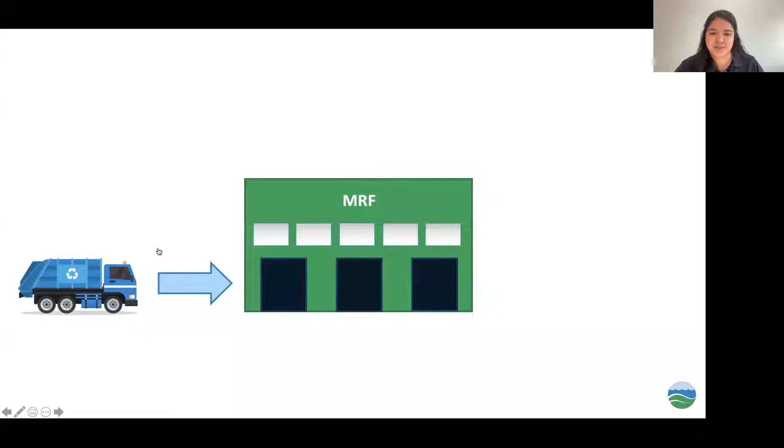So let's just pretend we're the garbage truck and we're making our way to the materials recovery facility. First, when we get there, we get to the little scale house. This is where all trucks are weighed once they go in, because we charge by the tonnage and the type of waste that you bring inside.

So in this case, Basil's driving, he's the chauffeur. So we're here driving in.

This is the first view that you get of the MRF when you drive in. There's a lot going on. And here to your left, you have these beautiful bales ready to be sold.

If we were here in person, we would be walking up in the mezzanine and we'd be able to see everything from up there. But it's pretty cool because now that we're virtual, we're going to be able to see a lot more and go into a lot more detail. Hopefully it'll be a better experience.

I think it will. So this is our Disneyland. This is trash Disneyland. Everywhere you look, there's different kinds of trash. There are different numbers to sort, to distinguish the different types of stations that there are. So we're going to try to go over the main ones.

I know a lot of people are obsessed with garbage trucks, so I had to put this garbage truck video. Sometimes there are kids watching, so this is the garbage truck. Here it is. Remember, this is your blue bin material, because this is the recyclable section.

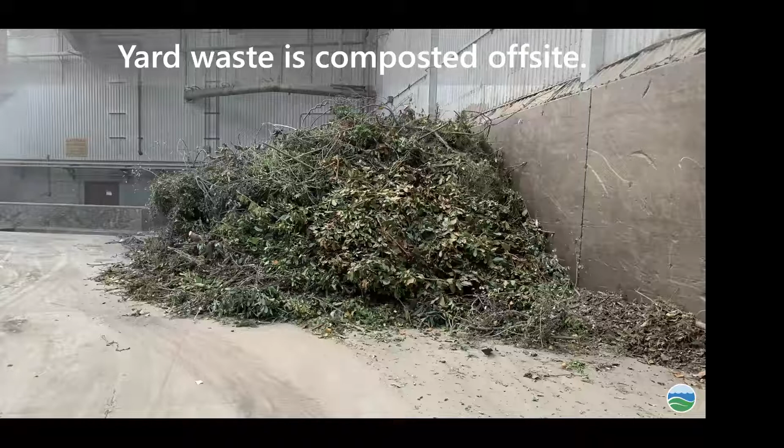Most of the recyclables, everything that you put in the blue bin, are shipped overseas. We have recycle markets, China being the main one, and a lot of the neighboring countries. A coworker described it as the perfect marriage, because a lot of countries around the world receive a lot of goods from China. So you have all these shipping containers coming in, and instead of having about 40 to 60% of them go back empty, it made a lot of sense to fill those containers with recyclables to send back over there. So there were no wasted trips.

However, China began to toughen their standards because there were a lot of impurities in the recyclable bales that they were receiving that had a lot of environmental impacts. So they started to toughen their standards, and soon they had the China ban, which was a series of regulations that placed stricter limits on the types of recyclables they were receiving. This had a huge impact, not only in the US, but countries around the world.

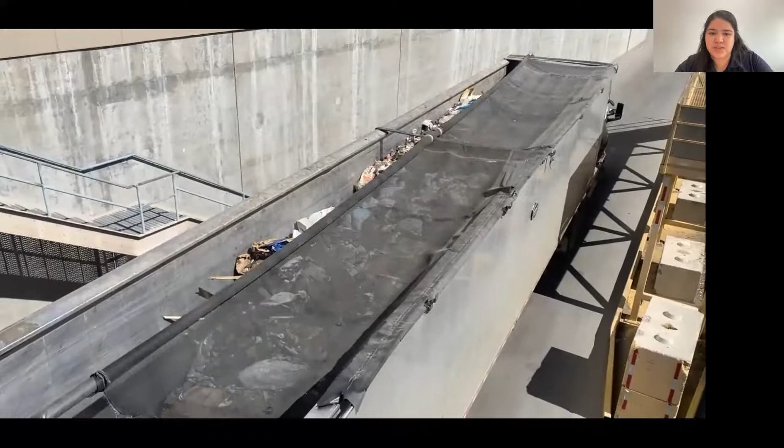So here we have a truck, one of our trucks that's leaving our MRF, and you can see it's carrying all the trash that didn't make the cut. And of course, we will cover the top of the truck so that none of the debris falls while it's being transported.

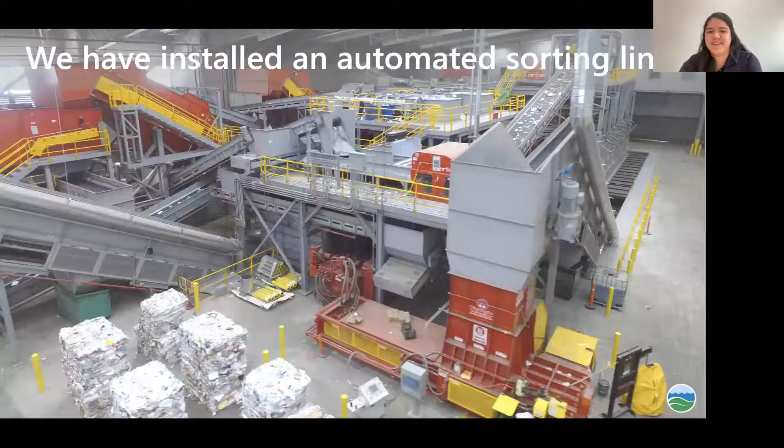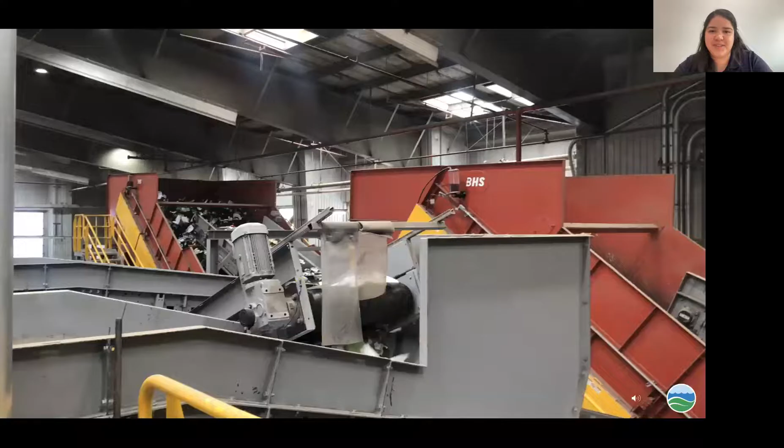All right, now going back to the automated sorting line at the materials recovery facility. We had planned this for a while, but the China ban definitely sped things up. Let me give you my little Willy Wonka type tour or overview of this materials recovery facility.

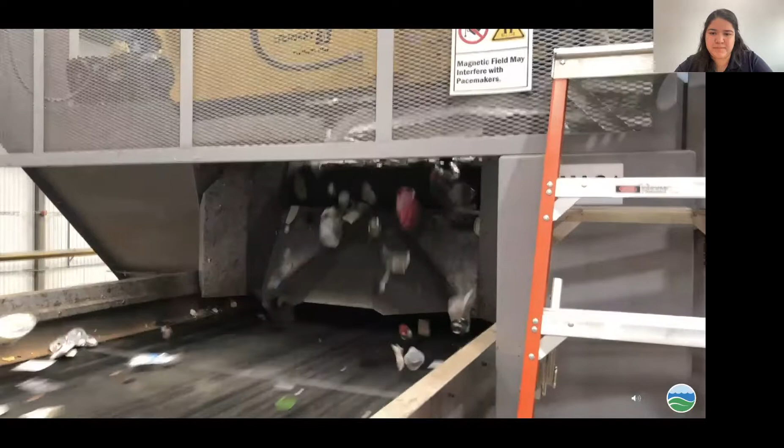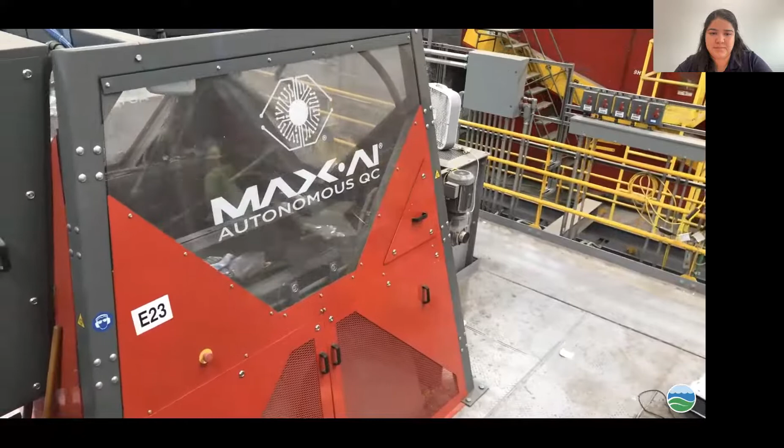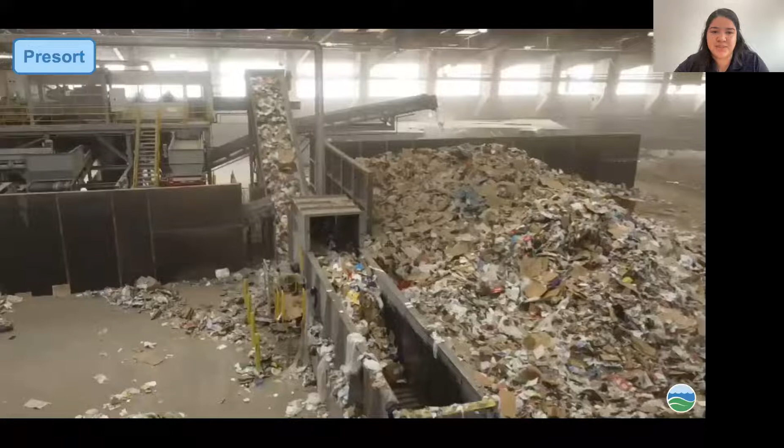Okay, so that's a short little overview. As you can see, there are a lot of moving parts that make up our automated sorting line. So we're going to go through the steps.

First we have the pre-sort, the pre-sorting machine. Habib, do you know what it's called? This just slipped my mind. Is it a crane or? So we have this machine with the crane tool, it's called a materials handler. Okay, materials handler, I was not thinking of that one at all.

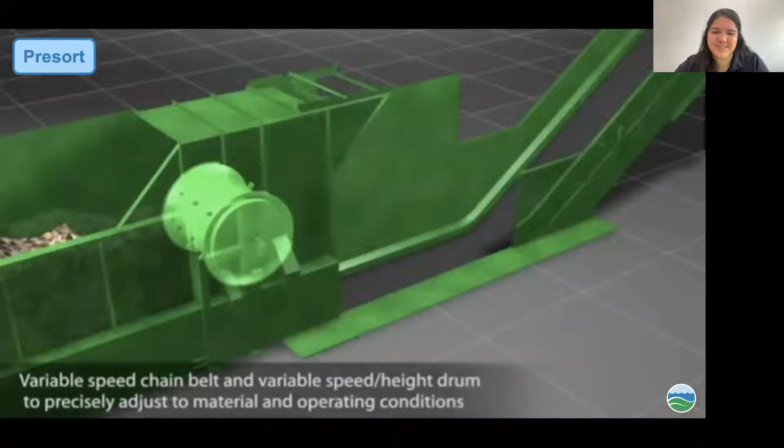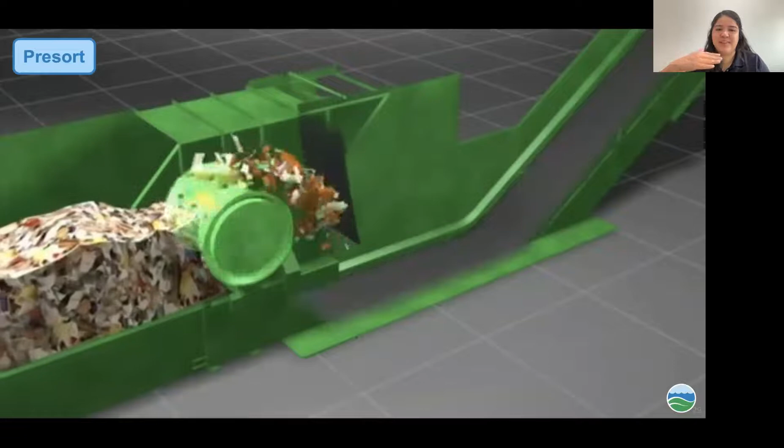The materials handler puts all this waste, the recycled goods, into this pre-sorting machine. What this pre-sorting machine does is it has a drum that helps flatten the waste out so it's easier to sort through. Some goes over, some goes under, making it easier to go through. You see staff right here doing a pre-sort check, removing any large items that don't belong there, or items that could harm our machinery, such as cables that could get stuck. So that's the pre-sort process.

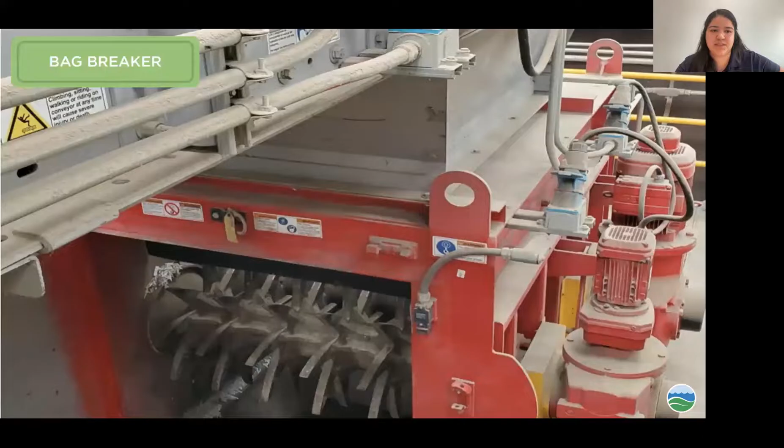Now we're going to start our official step-by-step of what this automated sorting line does. So, bag breaker does exactly what the name says. When the trash goes in, it goes through a conveyor belt and breaks any bags.

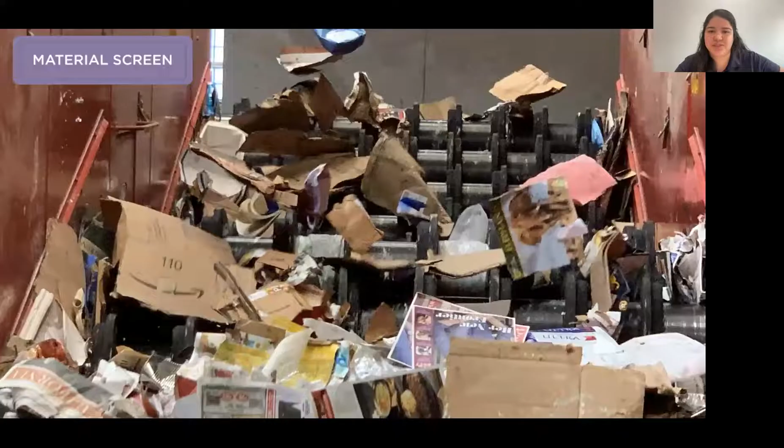From there, we have the material screen. The material screen is pretty neat because you have these rotating heads right here. What happens a lot through this automated sorting line is lighter material is separated from heavier material. So in this case, all of the lighter material like cardboard, empty water bottles, detergent jugs, is very light and it just kind of surfs through the top, while heavier particles such as glass go down, fall through, get crushed, and then are sorted separately and recycled.

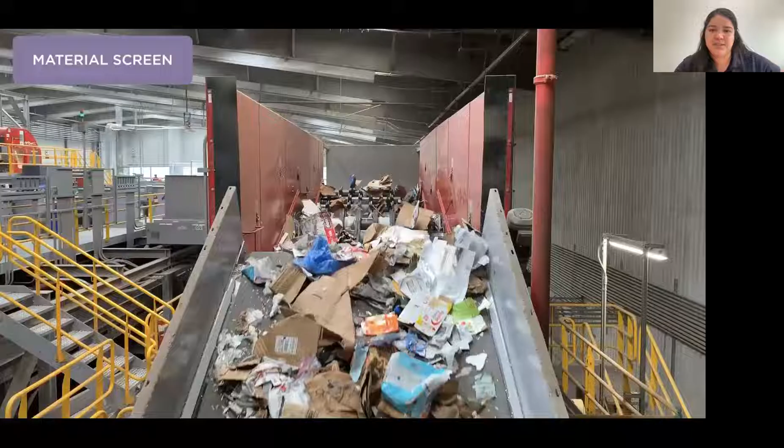So here you have a quick little video of how the material screen works. Let me just play that again. If you notice, you can kind of see all those light items just surfing their way through the top. You even have this little detergent jug flying over there.

So then after the material screen, you have the air separator that pretty much does the same thing again, separating some of the heavier materials, like containers with liquids in them or shoes, from everything else. Then we move on to the polishing screens, which separate from here.

We get two separate categories: 2D items and 3D items. For 2D items, you consider cardboard and paper, whereas 3D items are your aluminum cans, water bottles, detergent jugs, milk jugs, and all those other 3D containers you can think of.

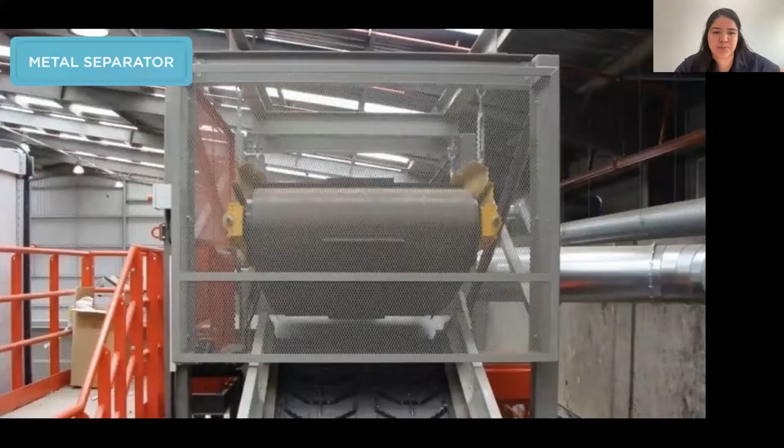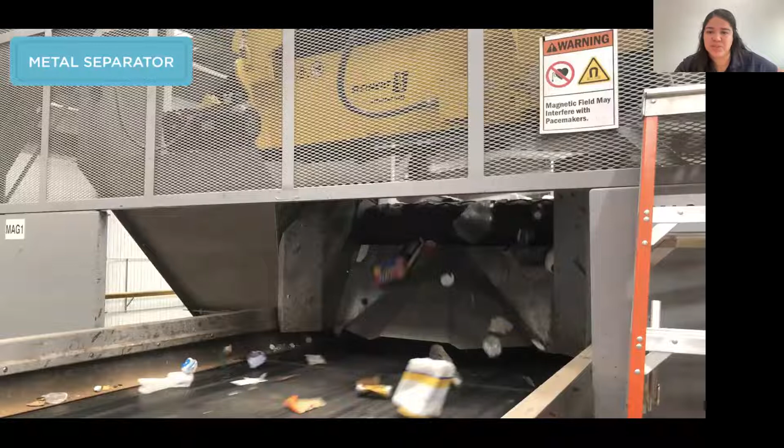So we're going to talk about the metal separator, which has two different parts. Here we have the one with the big magnet that is able to separate the ferrous metals. From there, it goes to another machine called the eddy current separator. What the eddy current separator does is it has electromagnetic rays that help sort out the aluminum within that way. So all the aluminum cans get separated out there.

So now that we have the metal separated from the 3D materials, this leaves us with all the plastics—the water bottles, the jugs, mainly water bottles and jugs.

So from there, we have optical sorters for each process. In the paper process, we have an optical sorter to sort out the cardboard and the paper. Then on the 3D side, we have an optical plastic sorter that helps differentiate between the different types of plastic because they go into different containers, different bales. So the water bottles will be separate from the plastic juice bottles or detergent jugs.

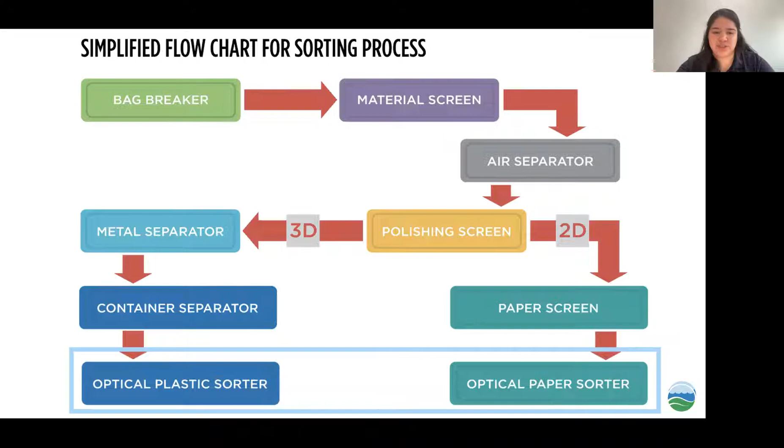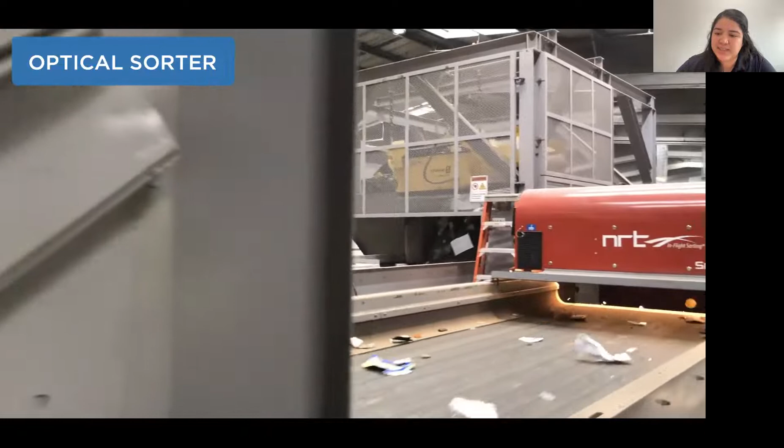So this is a picture of our optical sorter, and this is how it works. It uses infrared light to detect the type of waste it is, and it has little air jets at the bottom of the optical sorter that pump it up and help separate the waste like that.

So let me play this video again. If you notice here, I tried putting it in slow motion. The cardboard, it's like, bam, you see that? It just shoots up. It's really, really cool. So plastics have different kinds of thickness to them, and that's how the infrared light is able to detect which one should be sorted where.

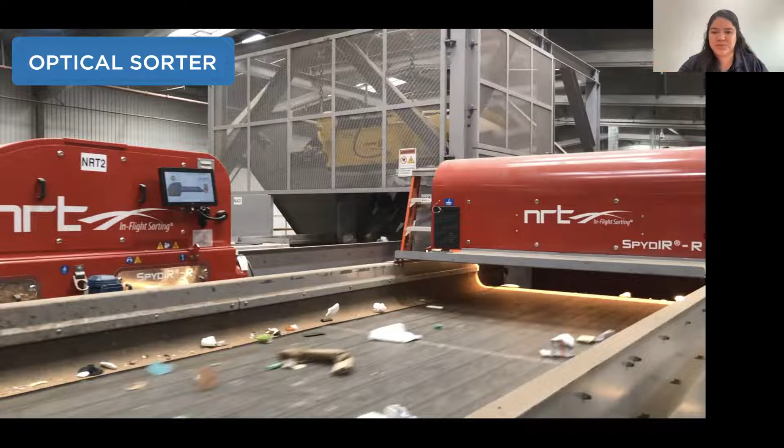Moving on, this is, I think, the more popular part of the entire automated sorting line. It's this robotic sorter, which is really cool. It does a post check of all the work that the other parts of the sorting line did.

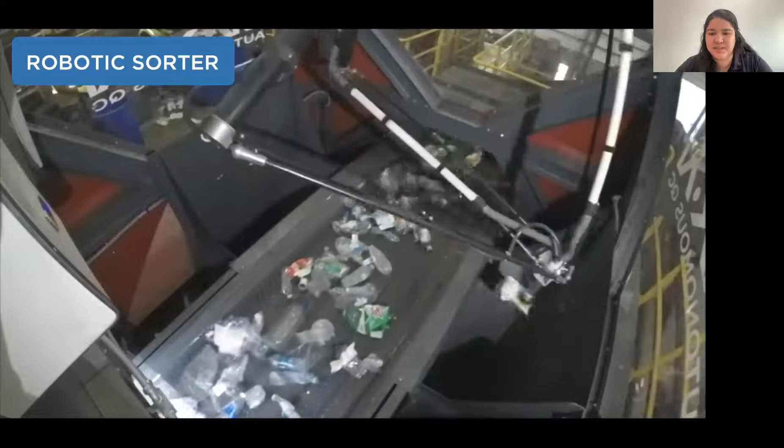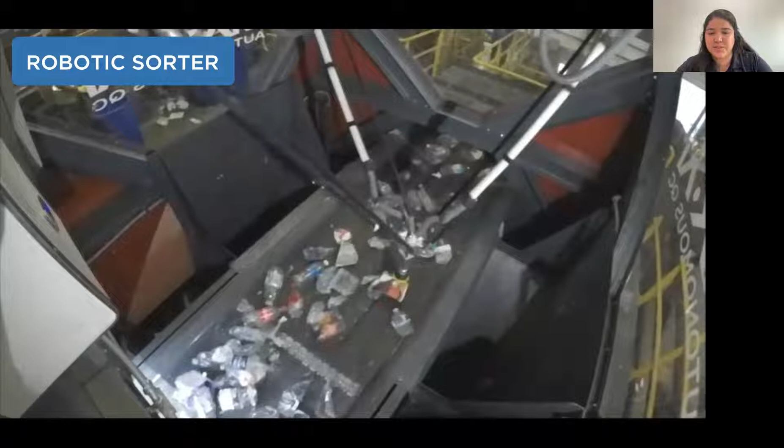If you see, it's removing any item that's not a plastic water bottle. What's really cool about this is it's not only 4 times faster than a human being that doesn't stop, it's nonstop, but it also gets even better with time because it learns from its own experience. So it gets even better.

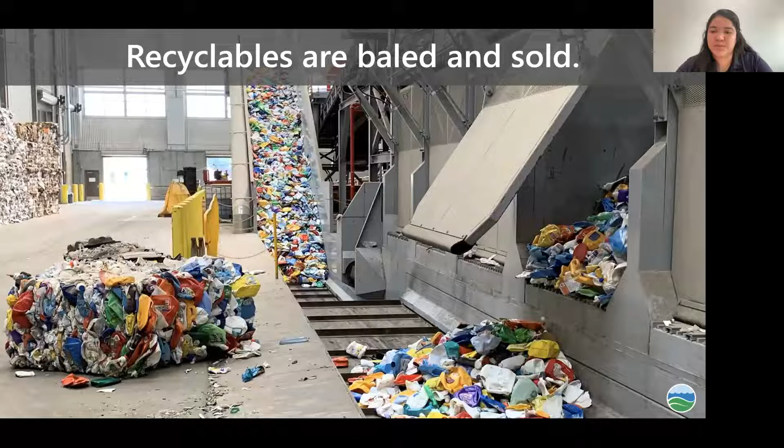So then after that, we also have people that do a post sort. And then after that, we have the recyclables. Now that they're in their different categories or different containers, they're able to go up this conveyor belt and then be baled according with the rest of their group.

Now, moving on to another portion, another service that we provide at the Puente Hills Materials Recovery Facility is food waste. But before we get into food waste, just a little bit of backstory.

LA County generates 21 million tons of waste per year. And of that 21 million tons, about 9 million tons is buried in landfills. Of that 9 million tons that's buried in landfills, a third of that landfilled waste is organic material — yard waste and food waste. So food waste that's disposed of in landfills can release methane to the environment if that landfill is not properly managed.

So the state of California recently passed a few laws to require cities to create programs to divert this organic material from landfills, to help residents and businesses divert this waste. The goal was to have a 50% reduction in landfilled organic waste by the year 2020, and then a 75% reduction in landfilled organic waste by 2025.

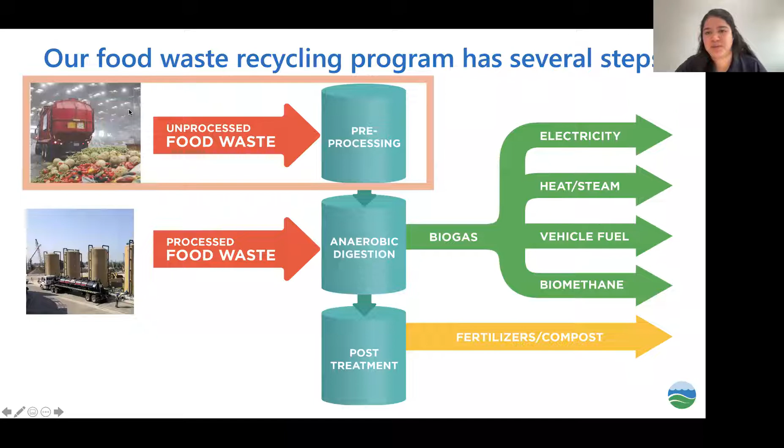Let's first start with the unprocessed food waste. I mentioned the garbage truck in the beginning that we came in — some of them drop off recyclables, some drop off yard waste, others drop off food waste. So here is an example, a beautiful example of source separated food waste that we collect.

Acceptable source separated food waste will have no more than about 10% impurities within that load. If you notice here, it's really all food waste, with the exception of these little small cardboard pieces, but the majority, definitely more than 90%, is food waste. So this would be an example of an acceptable load.

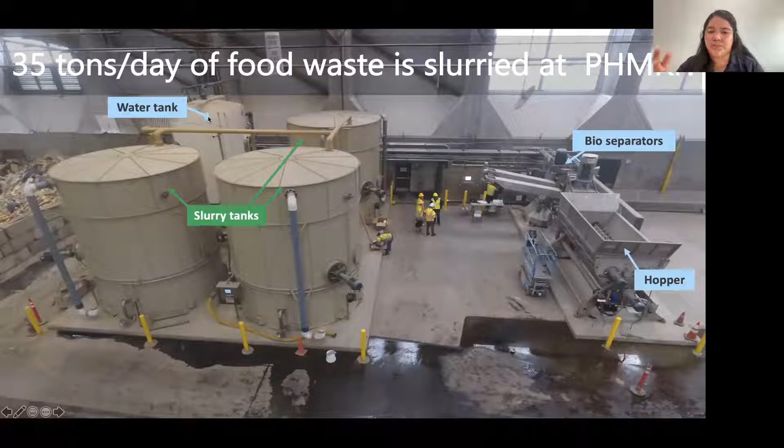This food waste is then processed at our materials recovery facility. We process 35 tons of food waste a day. This is our DOTA system that is able to convert this food waste into slurry. We have the hopper here that has a bag breaker and pushes that food waste to the bio separators that grind up the food waste and turn it into a slurry. Then here we have our slurry tanks that store that slurry, and our water tanks in case we need to dilute the slurry a bit.

So let's watch a video of our first load.

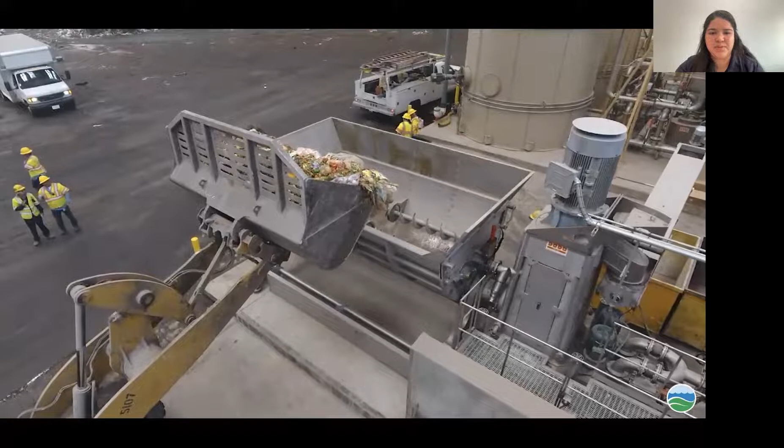The first load that happened a few years ago — was it 2016, Habib? Or no, it was later than that, right? Like 2019?

Yeah, about 2019. So this was the first load. We had already been accepting food waste before 2019, but in 2019 we had this whole DOTA system put in place.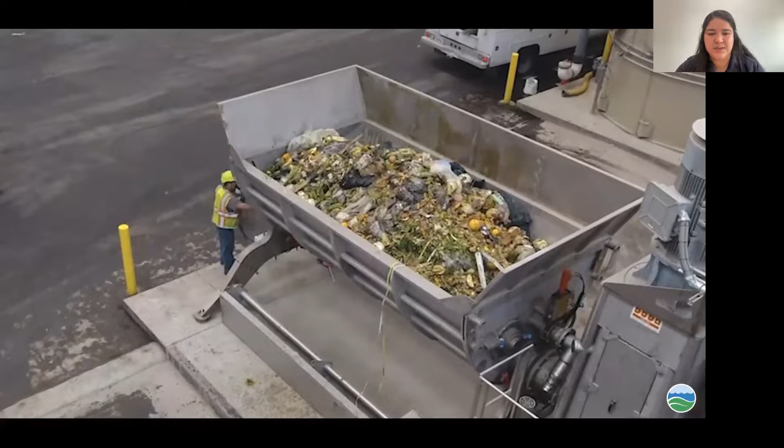If you notice here, food waste is being dumped in, and then the hopper turns on. You see it churning, breaking the bags, and then it's sent to these bioseparators here to the right. A good analogy is comparing it to a garlic presser, which you're going to see in a bit.

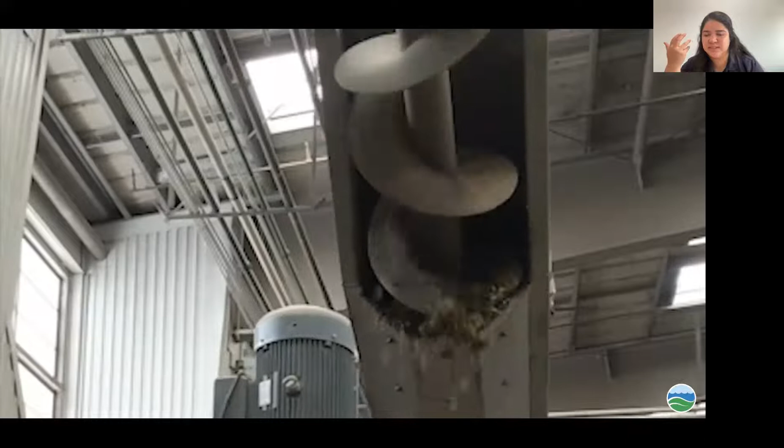So when it goes through these bioseparators, it presses the food waste from the inorganic materials. If you're thinking about a garlic presser, it's like the skin of the garlic, right? So any inorganic material is sorted out in the machine, and then it presses it.

So it goes through it twice. On this one, it has even finer holes. The food waste that you get out of that is now separated from the inorganic material that's left out. And then it goes through a secondary process, and you'll notice here the food waste is a lot finer.

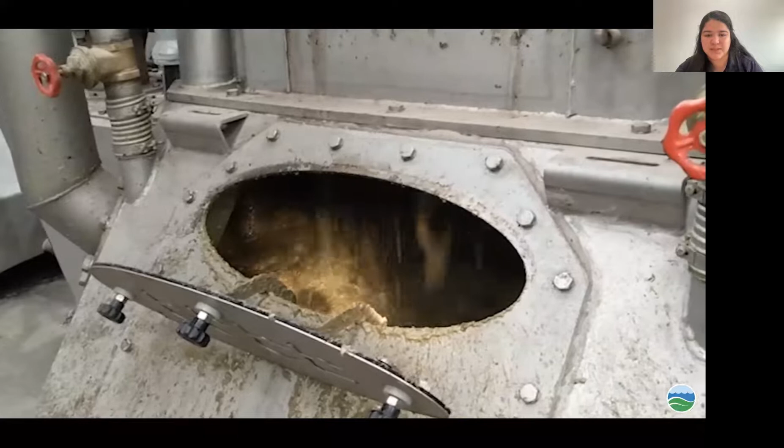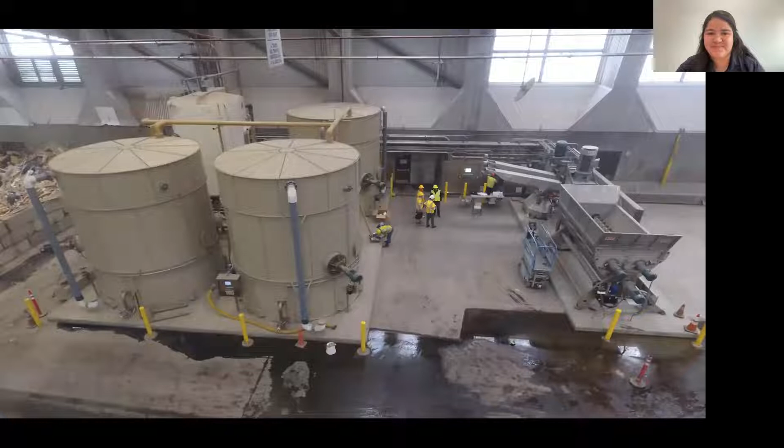From here, it's turned into this slurry that looks like a Coca-Cola Slurpee, but not as good — though Coca-Cola Slurpee was the first thing I thought of. So now that we have the slurry, we put it in the slurry tanks.

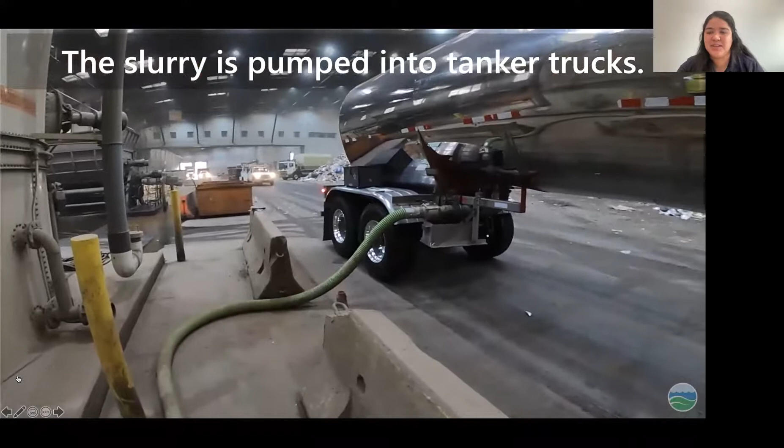The slurry is then pumped into these tanker trucks, as you see here, which is kind of cool because when I saw these tanker trucks out in the street, I always thought it was just gasoline being transported. But in this case, it could also be food waste slurry.

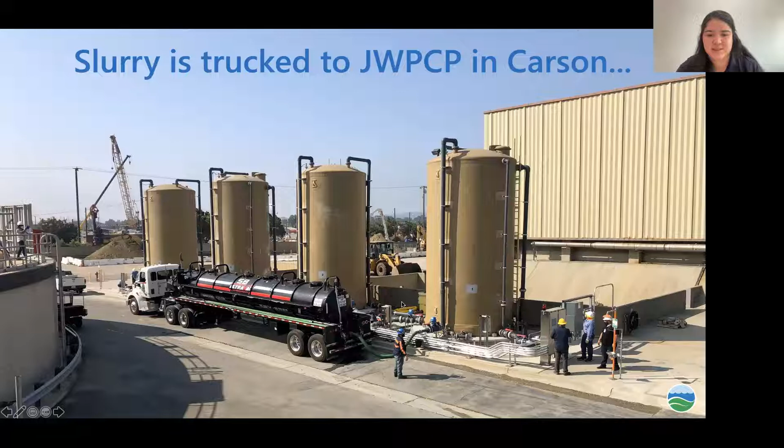This food waste slurry is then transported to the Joint Water Pollution Control Plant in Carson. Here we have our slurry tanks for receiving at the Joint Water Pollution Control Plant. This is where we go to the next step of this food waste recycling process.

What we do with the processed food waste is we put it in these anaerobic digesters along with the solids that we have recovered from the wastewater treatment process. So all the solids left over from the wastewater treatment process are put into these anaerobic digesters.

With this food waste now, it's heated up to about 96 degrees. It's kept there for about 15 to 16 days. We have these microorganisms that feed on these solids and organic material, and from there, we get biogas.

From there, it goes to our energy facility at the joint plant, so we produce energy from this biogas. We produce 20 megawatts of energy, which is enough to power 20,000 homes.

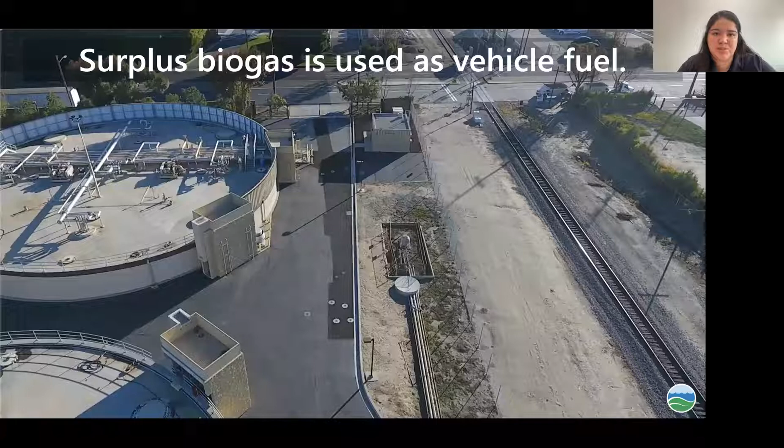Now that we have surplus biogas — and let me mention too, with just a little bit of food waste that we add, we were able to double the amount of methane we produce in these digesters — with our food waste program, we'll have surplus biogas. So we created a pipeline to take it from these digesters down the street.

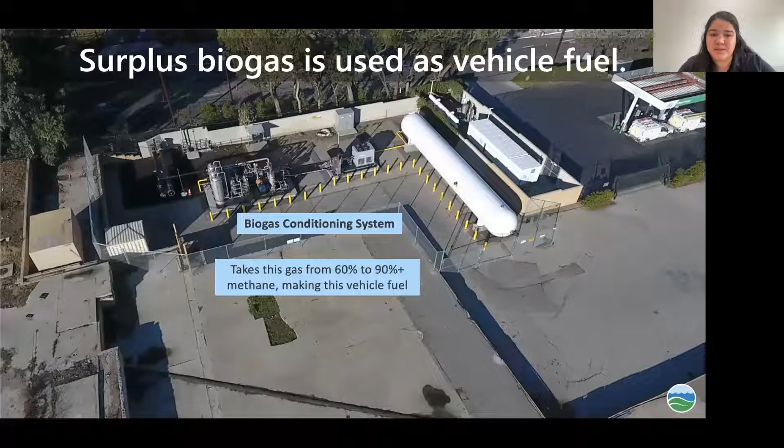You see here, the middle one is where the pipeline goes. We make a right over here, and we see our biogas conditioning system. This biogas conditioning system takes this biogas from 60% to more than 90% methane, which is able to turn this into vehicle fuel. This is a picture of our biogas conditioning system.

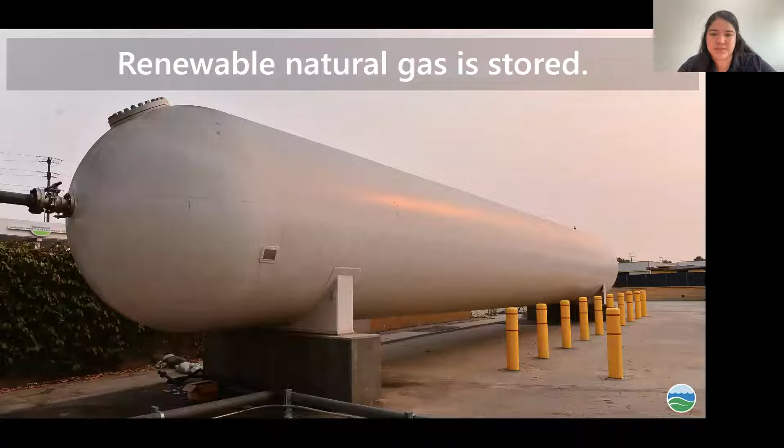Right next to it, we have the natural gas storage tanks, and right next to that, we have our fueling station. This is pretty cool to me because one minute we were just talking about food waste, and now we're talking about how this food waste literally gets turned into vehicle fuel.

So these cars that run on natural gas, it's running on our food waste. It's pretty awesome, I can't get over it.

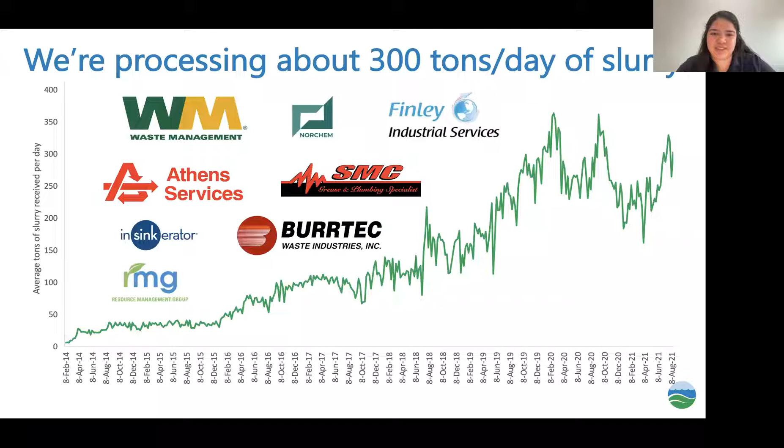We're processing about 300 tons a day of slurry. These are our beloved customers that bring their processed food waste to us. So of the 300 tons, that's equivalent to about 2,000 gallons of gasoline per day.

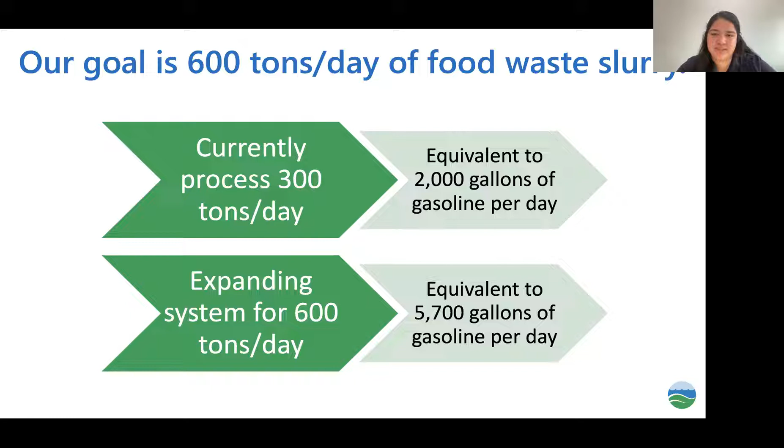We're currently expanding our system because we expect to be receiving even more food waste with new California state mandates. We're expanding our system to be able to receive about 600 tons per day, which will be the equivalent of 5,700 gallons of gasoline per day. So if you have a regular car, we'll be able to fill it up about 570 times.

So we went over how we generate electricity from it. We can charge cars. We have a car charging station at the Joint Water Pollution Control Plant, and this one is at our main headquarters in Whittier. We have the vehicle fueling stations, and in the future we can also inject it into the natural gas pipelines.

This concludes our story on how special the Puente Hills Materials Recovery Facility is. It helps us be one of the biggest producers of green energy. We generate about 28 megawatts a year, and we only use about 23 megawatts for some of our facilities. So when you add that with the 20 megawatts we're producing from wastewater management, and 30 megawatts from refuse to energy, any surplus energy goes back to the grid.

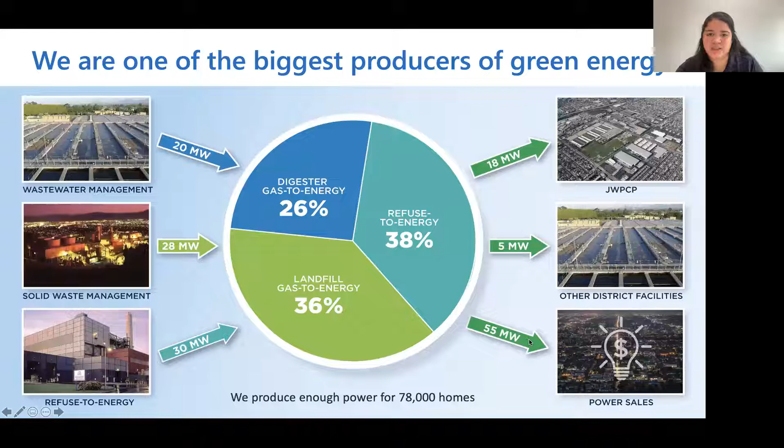With that, that concludes today's tour. I hope you enjoyed the virtual tour, but being in person is also really cool and has its own benefits as well, so we look forward to welcoming you into our facility soon.

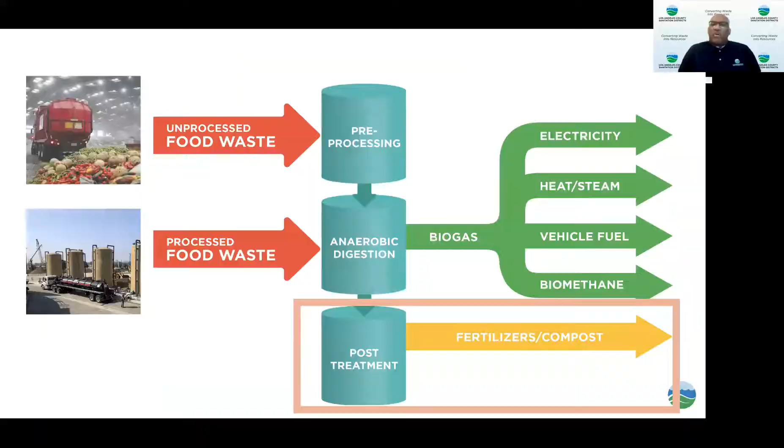The first question is from Professor Melissa Michelson: Why did it differ with the number of employees, temporary employees? Population doesn't increase or decrease that fast to produce more or less trash.

Habib answered: The sanitation district's facilities can accept waste from mom and pop haulers cleaning their garages, all the way to commercial haulers in LA County. We do not go and collect trash from residents or from the commercial industry, we just have our facilities and they're welcome to come to us. So we don't control the streams of trash or recyclables that come into our facilities, it's really dependent on the haulers themselves, and haulers could change their routes or decide to go to different places.

Certainly, depending on the habits of the residences, trash could vary, recyclables tonnage could vary. So depending on that variation that we have no control over, we need to have the ability to react to that and be able to still continue providing the service of recycling in a cost-efficient manner.

I think to add to that, the material recovery facility is geared so that if there are different things that now have value and can be recycled, we can ramp up with more folks. Like Habib mentioned, in January there's a new program where we're going to separate food waste from green waste, and that's going to require more personnel, I would imagine. Of course, with every additional program and every new equipment we get, the labor requirements change.